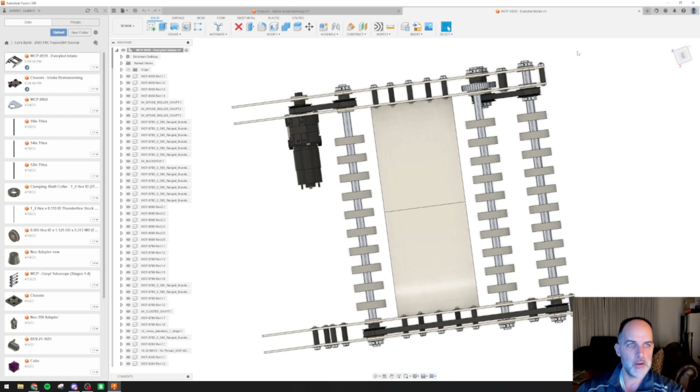It's going to be a little bit wider than what we need, so let's go ahead and measure that. So we'll see, from that edge to that edge, it's 16 inches.

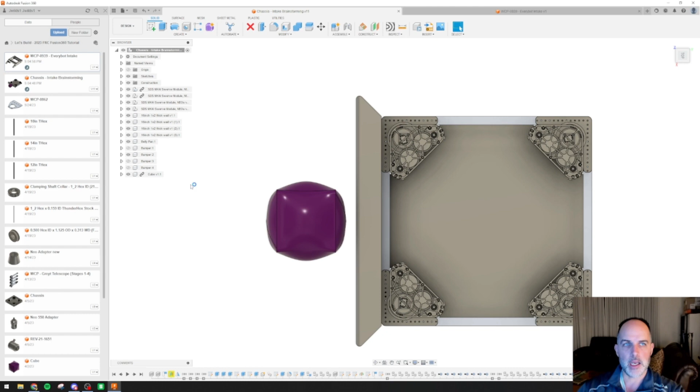So let's go back to our robot and see what it looks like. Now, the other thing we can do here is, even though we're going to make some edits to this, we're going to start pulling some stuff off of it. I'm going to go ahead and drop it into our intake brainstorming, so that whenever I make a change to the intake file, it will update in our full assembly.

So the first thing, actually, let's just leave it there for now. So we'll just hit OK. Just leave it there for now.

But we've got to get this thing in the right orientation. I hate how this is all in the wrong orientation. So what we're going to do is, I'm going to do a Control A. That won't work. So we're going to just go down and pick everything in the tree.

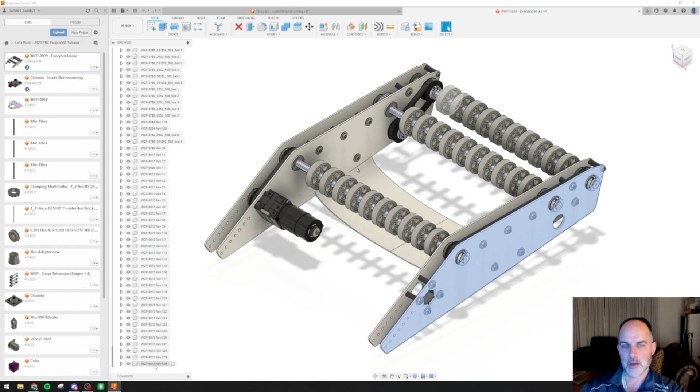Scroll down. So I clicked the first item up there, and that's how I got this polycarb panel. And I'm going to shift click down, and I've now selected everything.

So I want to move that and get it all into the right orientation, and the only thing we need to do that is rotate it 180 degrees. There. All right. So what I'm going to do is, I'm going to save this.

And then go back in here, and you'll see that my component is out of date. That little exclamation point sign there, what that means is, hey, somebody, me, made an edit to a component that this drawing is referencing. So what we're going to do is get the latest version.

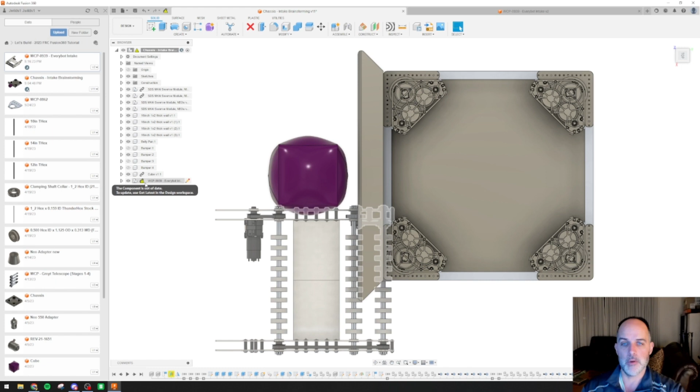Remember, all I did was flip it around. It's not showing that rotate. It's not showing in this file. So what I have to do now is, I can either right click and get the latest version, or it's also reflected up here in the main toolbar. So I'll do that. You can see now I've got my rotation.

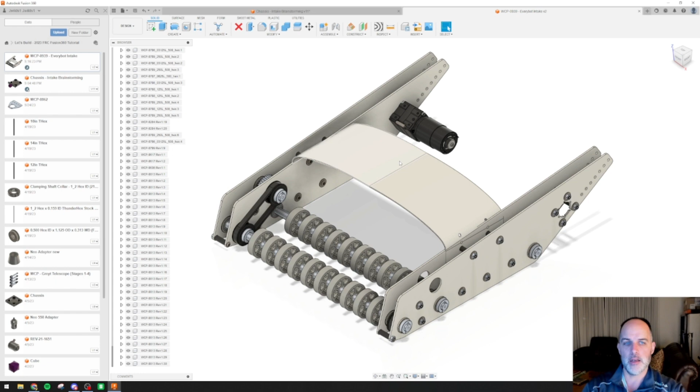I'm not going to worry about the positioning just yet. I'm not going to worry about the positioning, I should say, in the intake file itself. I'm going to worry about the positioning over here. So let's go over to the top.

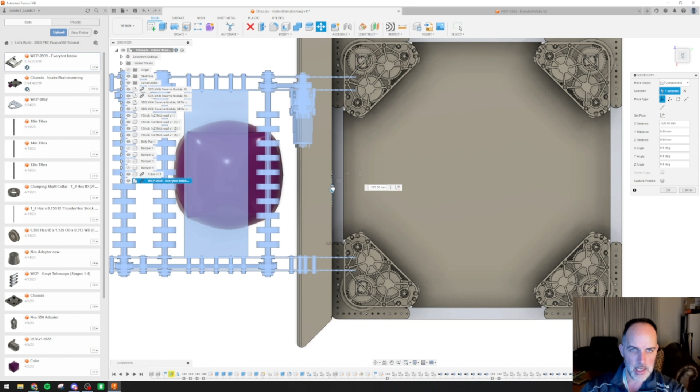And the nice thing too, by doing that, is I can just click once and get the whole assembly. And I hit M to move it. And right there, it looks about centered, maybe a little bit more. Again, I'm not overly concerned with how centered it is at the moment.

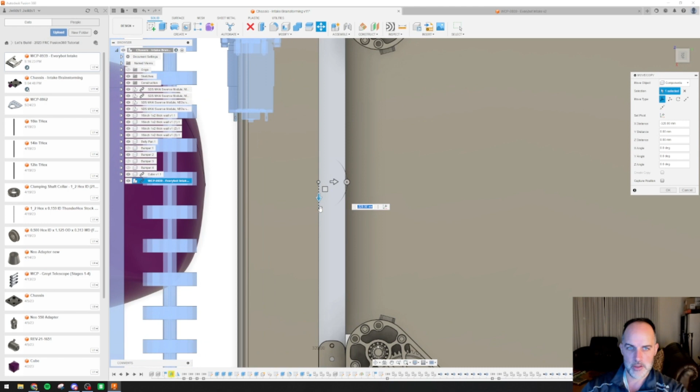We will fix that in a little bit. And what I'm doing to gauge how centered I am is I'm just looking at these mounting holes for the swerve modules. So this is like 3.5 mounting holes, and this is right on 3. That's too much. Again, too much. Probably gonna spend way too much time on this because I'm an engineer. That's close enough for what we want.

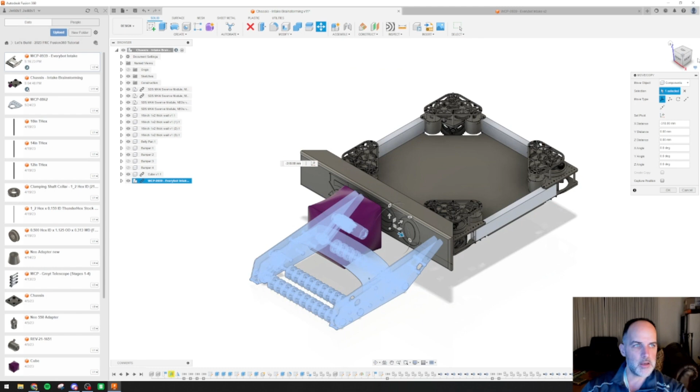Now, we also want to look at it vertically to try and get it to the right spot. That's pretty close, because what we're going to do eventually is there's going to be a little bit of give to that intake, the way we got it, what we're going to do with it, so that it will be able to go up and over the cube. So it doesn't have to be, you want a little bit of give.

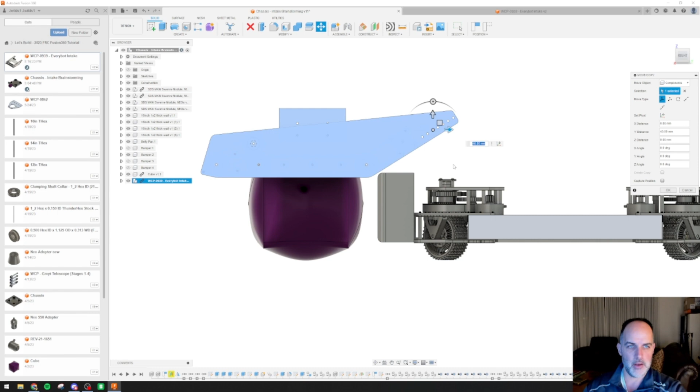Now the other thing we have to do is bring it back a little bit, because we don't need to be that far out past the robot. So let's double check. That actually looks pretty good in terms of width. Still got a little bit of room on either side of the robot. Heck, I mean, if we wanted to, we could even go even wider. But I think for now, we'll keep it the way it is.

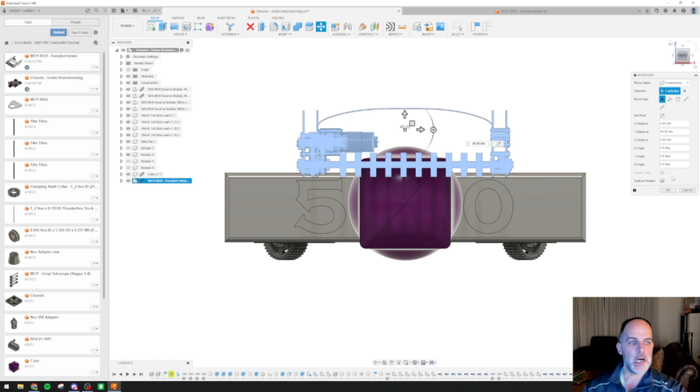Again, trying to get this thing done in the next couple of weeks. So all in all, that positioning looks pretty darn good.

And we'll just hit OK so we can get rid of the part selection.

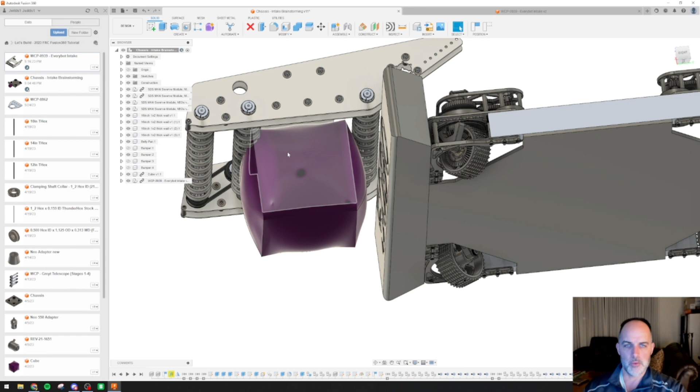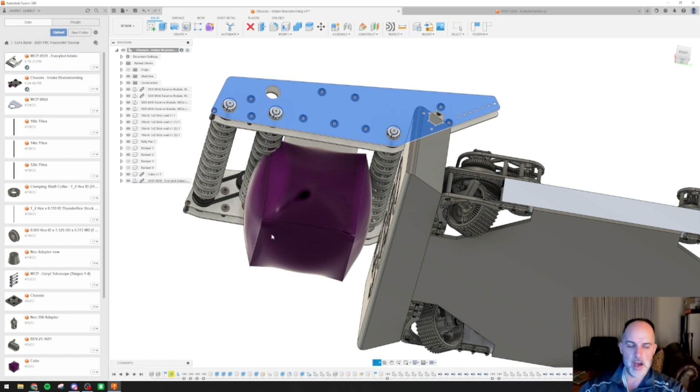If you look, there's a pretty good amount of what we call interference between the cube and the rollers, mainly from a top view. If I turn these polycarb panels off, which I'm not going to because then I'd have to bury myself in the part tree, you can see there's a pretty healthy amount of interference.

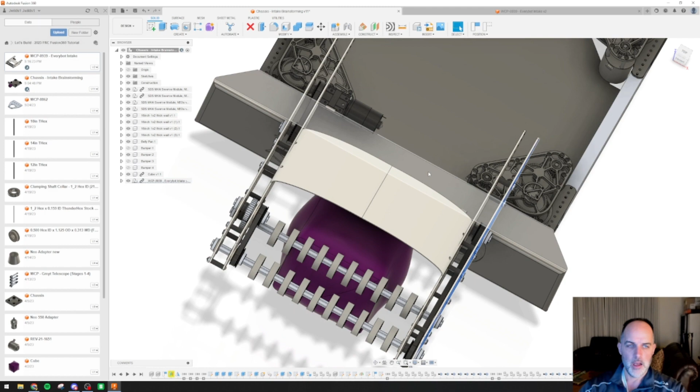Which is a good thing in this case. Now the way this intake works is these rollers, you got a Neo or a Neo 550, whatever, back here that is driving this belt, and that is driving this shaft.

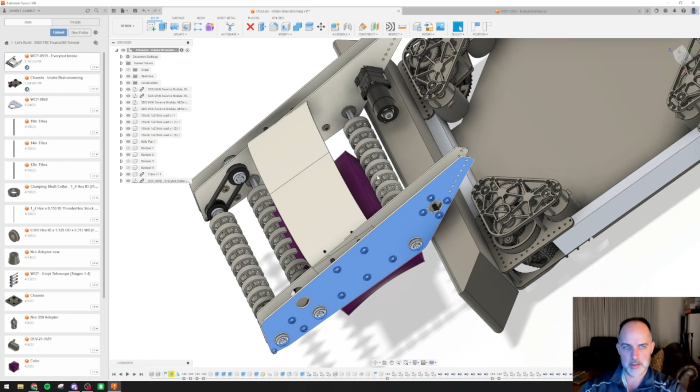And then it's just snaking through in between the polycarb rails, so that this rod is always rotating the opposite of this rod. So to do that, there's some gearing in there.

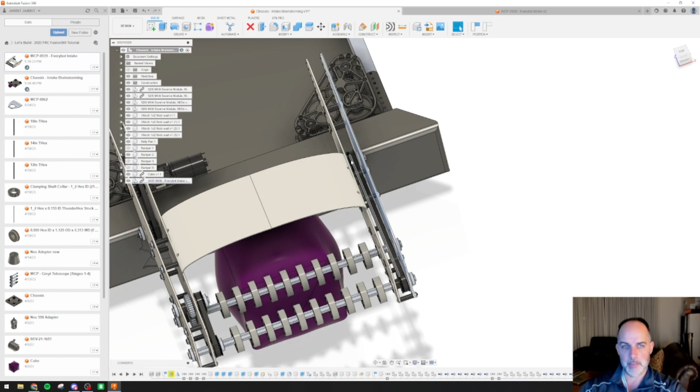You can see if you look at this, this belt is really long, and it comes up to this front roller. Okay, now what happens is, that means the back roller, that one right here, and this one rotate the same direction. But for this one, there needs to be a change in direction.

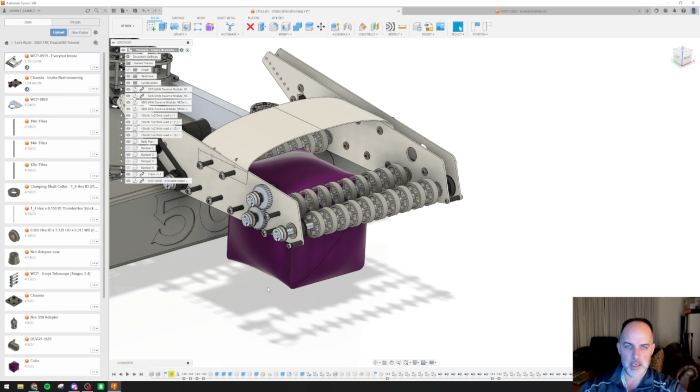And to do that, they do some gearing, and that gearing is over here. And actually, I will turn this plate off, so you can see that gearing is right here.

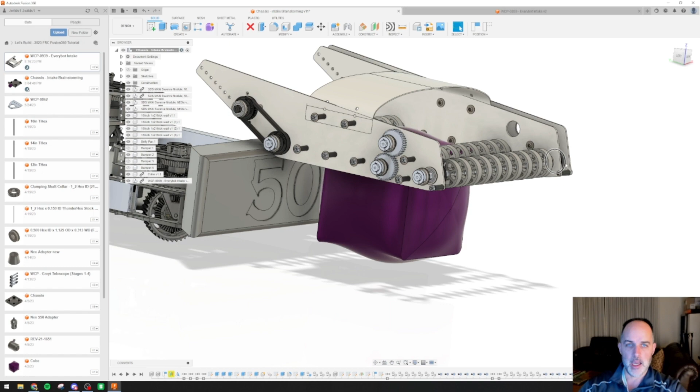So what happens is, remember, there's our motor. That's driving the rear shaft, which is also driving the front shaft because of that long belt on the other side. And that comes through here.

But if you look, there's a belt coming up here. That means this shaft is rotating the same direction as these two, the rear and the front. But if you look, there's this gear pack here that is what changes the direction.

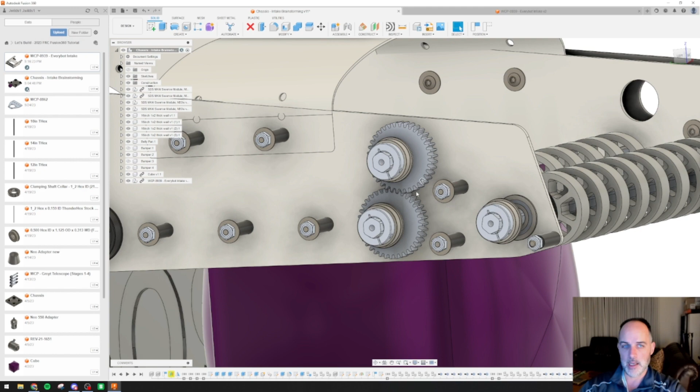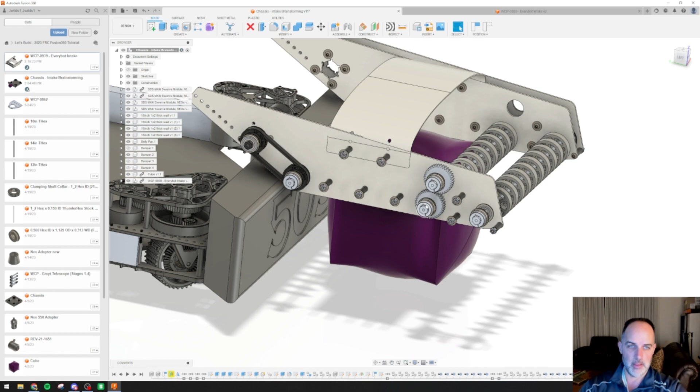And that's what we need to end up saving. We need to figure out a way to get the motors... if we're going to eliminate this front package here, which I really, really would like to do, we have to figure out a way to get this shaft and this shaft rotating in opposite directions.

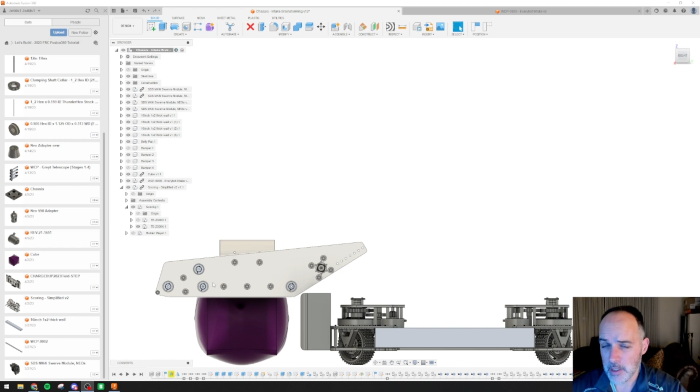Okay, in the interest of trying to get this thing done, I'm going to table the discussion on removing the front roller. There are ways around it to get the counter rotation, but for now, we might come back to it. But now what we have to do is try and eyeball and figure out, hypothesize some ways

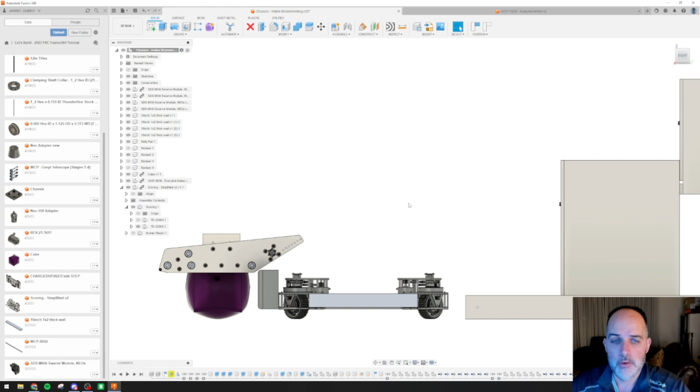That we get from the front of the robot and maybe into an intermediate position in the middle so that we can protect our very, very important cube as we're traversing across the field, and then be able to eject it out this way. So all we're gonna do, you can see I brought in the scoring area.

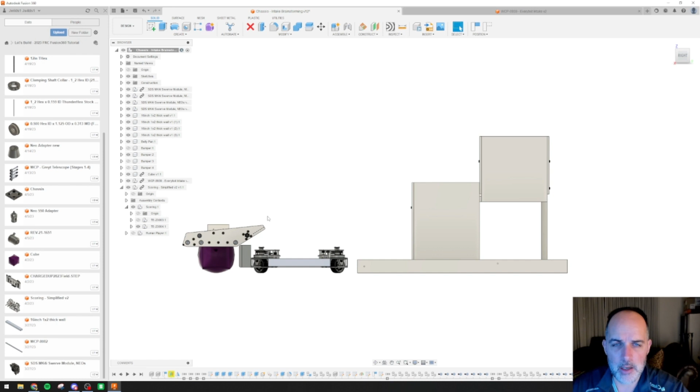All we're gonna do now is we've got this in roughly in position fore aft and up down, but we can play around with where about we want to position like a pivot. If we wanted to come over just a simple one axis pivot, there's not a whole lot of weight out here, so it doesn't have to be super robust and doesn't have to be geared down really strongly. So we could probably get away with just a simple single pivot. That's what we're going to try and do.

So what I'm going to do is collapse those. So there's our intake. All I'm going to do is start messing around with a hinge position. Now the thing we got to keep in mind too is when we hinge it, we got to also kind of think about at what angle do we want to launch this at.

Because obviously the ideal angle is about 45 degrees. It's the most forgiving in terms of speed accuracy coming out of the intake. So we're going to try and think about seeing if we can get this plane that's made, or this line, to 45 degrees as much as we can.

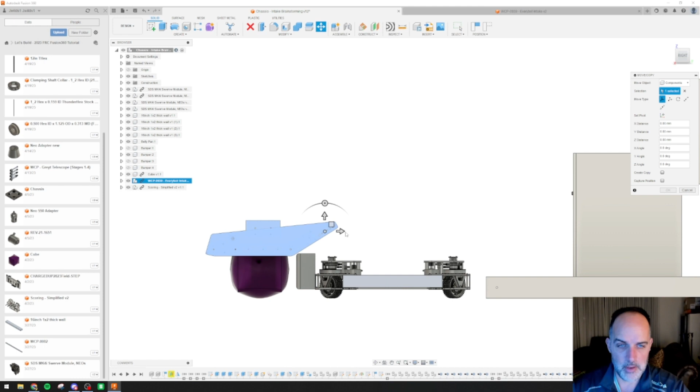So thankfully Fusion just picked a random rivet hole, because eventually what'll happen is those will get riveted to some 1x2, and let's just see what happens. So that's about as far as we can get it, which doesn't look like it's going to be enough.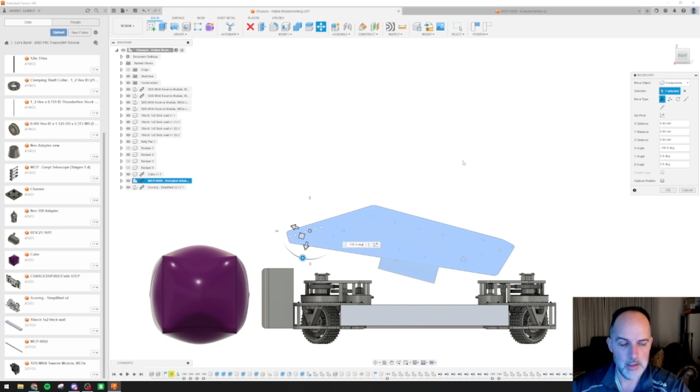It's nice in that it's enclosed fully in the robot, and you can see here, but it doesn't leave a whole lot of room for anything. So let's see if we can pick a different pivot.

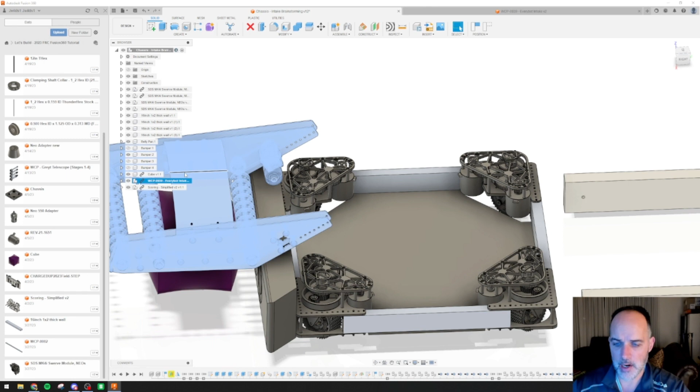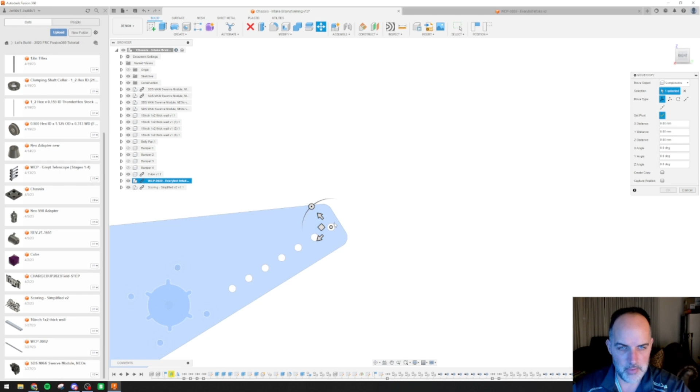We're going to cancel that, and then I'm going to just try and move it again. So this time, let's go to the right, and I'm going to change my anchor point this time, and to do that, over here it's set pivot. So I'm going to click on that set pivot, and now you can see it doesn't really matter what this angle's at. It's just starting. But we're going to use that pivot, that rivet hole, as our axis, and see what happens there. Let me zoom up a little bit.

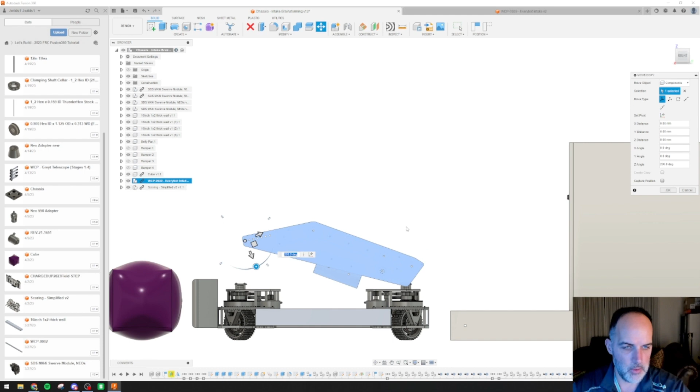Getting closer. And the other nice thing is if we can contain this whole thing in the robot, this could almost be our starting position, which would be really nice. It'd allow us to preload a cube, and...

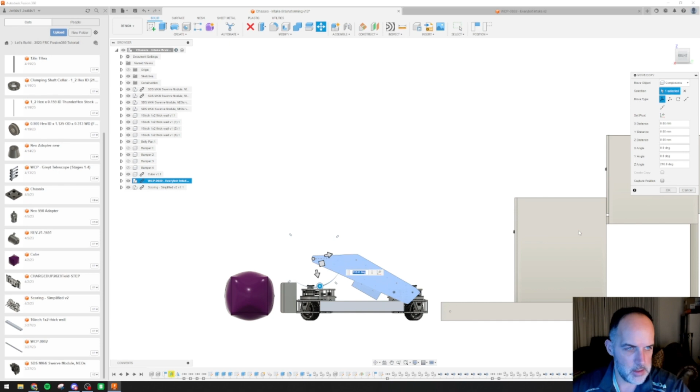All right, so it's looking like we're gonna have to start making our pivot somewhere 2 or 3 inches above this point here, which kind of stinks.

We could also go a little bit rearward, but again, what that would do—by rearward I mean following this line up to somewhere right around here. Oops, not sure what happened there. We could do that, we could follow it up a line like this.

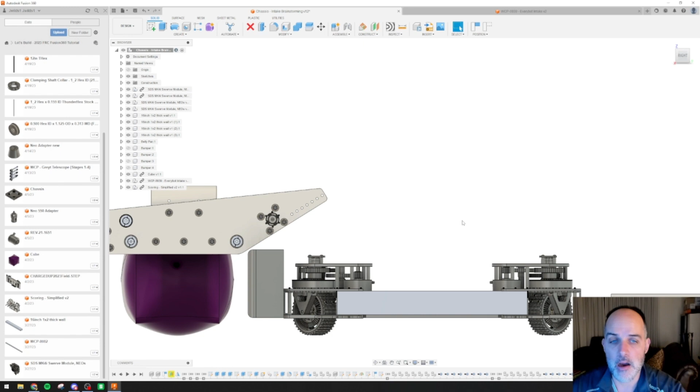The problem with that though, again, becomes starting position of the robot. The further out and towards the rear of the robot we go, the further out our intake will extend from the frame of the robot at start, and we don't—it would be nice to have a start position where we can just pop a cube up into the launch and not have to position the cube or position the arm in a position. Now, another option we could do—no, we can't, never mind.

So now we have to figure out, okay, how far up do we go? So we'll come back to that in a second.

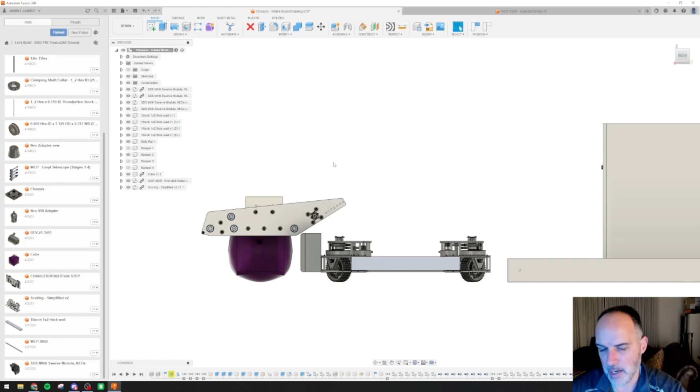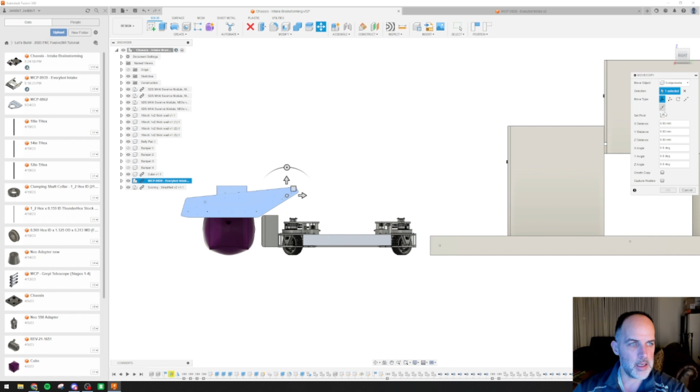Okay, after some careful consideration, I've decided to not relocate the pivot point, and I'll walk you through why. So let's go ahead and put that back using the last pivot point we used, which was this top rivet hole. We'll do that. And then we're going to rotate it all the way back around again.

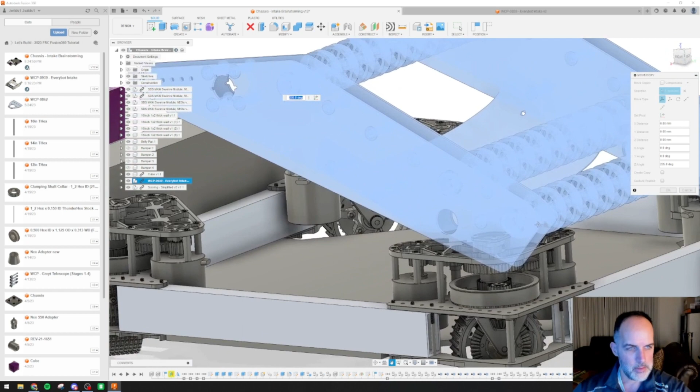So we can keep going, and so let's even go even further. Right about there.

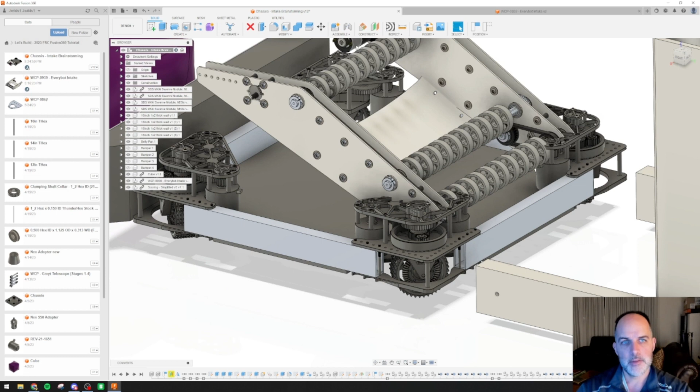All right, we crashed pretty hard through all of our swerve modules, right? That's a bad idea. But if you remember, we had said we were going to try and eliminate this as best we can, that front intake there. So problem one is we have to figure out how to get rid of that front intake, or that front axle. And then the other problem was, how do we get this axle to rotate in the opposite direction of this axle?

Well, it occurred to me, we've got another motor mount back there. So we could literally just, if we wanted to, throw another motor back there and go straight to this axle without any problems, and just have this motor and this motor run at the same speed, just different directions. So that solves that problem.

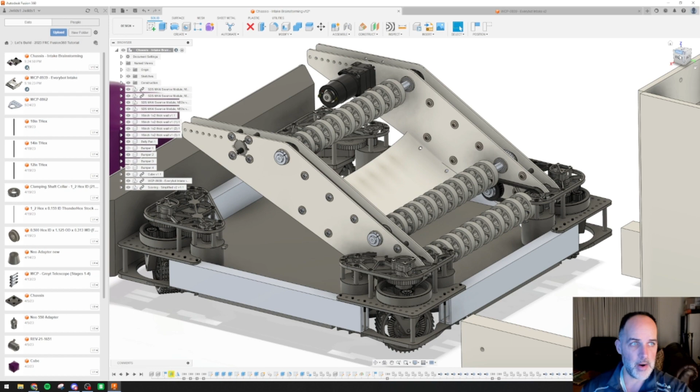And then if we go through and say, hey, follow through on our commitment to eliminate this whole front axle and clean off all this polycarb that we said we weren't going to use and didn't need, that could solve our crashing problem. And then if I look at it from the right, it's not exactly 45 degrees.

I don't know if this is going to give us an angle in a plane. Doesn't give us an angle. Let's see what that does for us. Nope.

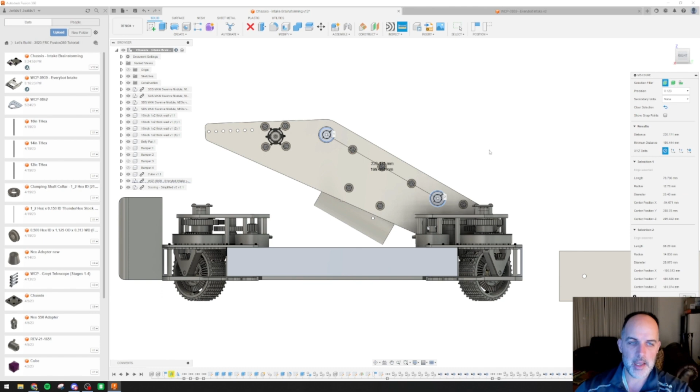I mean, we could do the trig realistically if we wanted to, but looking at it, it's 30-ish degrees down. So the cube will launch out at roughly 30 degrees, and we could even possibly get it further depending on how crazy we go with cleaning this out.

I mean, we could almost get it to sandwich down and sneak behind this 45-degree frame of the swerve module. So...

Let's commit to that. And that's the one thing with CAD and the robot brainstorming ideas—once you get to what your team feels is a solid idea, you get more people moving towards a certain idea. Just cut bait, cut and run, commit to that idea, because with the way FRC robots go and the timing, the such short time frame it takes to brainstorm and CAD and build and test, there's not enough time to just iterate and iterate and iterate on possibilities. You have to commit to one and just go.

So that's what we're going to do. We're going to commit to this idea and go for it. And if we have to think about other ways to do it, we will. So next video will be clearing this out. We'll probably dedicate most of the time to updating this Everybot intake.